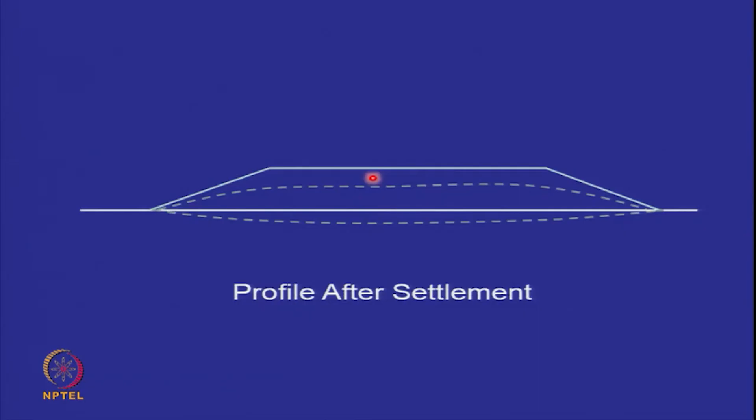So what kind of observations are there in literature on settlements with time? If you plot settlement as a percentage of waste thickness with log time, all the data falls between two boundaries. Firstly, the spread of the boundaries is very large, and secondly, it shows that even if you plot it with log time, there seems to be an increase on the log time basis as you go further ahead in time.

So typically a waste may undergo 1 to 3% settlement within 1 day of its placement, 2 to 10% settlement within 100 days, 3 to 15% settlement say within 2.5 years, and up to 30% settlement over 25 years or more. And the upper limits are all for when the percentage of biodegradables are high.

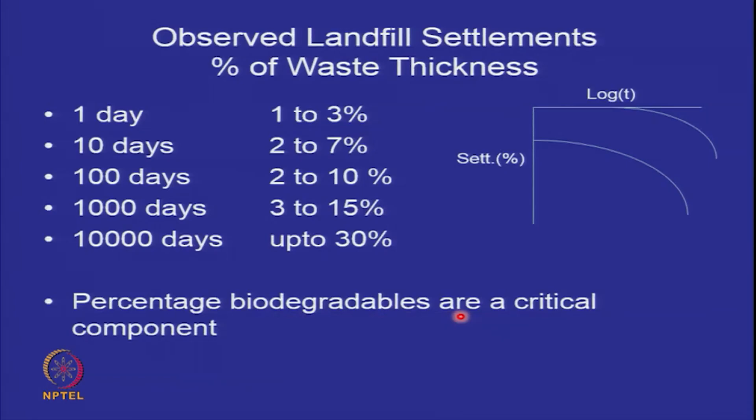What are the mechanisms? We know that we have some mechanical processes, mechanical compression, so densification, grains coming closer together on account of application of overburden stress. But because the grains are not made of silica and they are not rigid, you can have distortion of the grain. The grain itself, suppose to begin with, it is a particle which has a particular diameter. Because of the stress, the diameter may change, its shape may change. It may undergo bending. You may have a linear element which undergoes bending. Many grains may crush. This is even at nominal stresses.

So if there is crushing, that is additional mechanical compression, and of course there may be reorientation. So mechanical compression is not the same as in soils. There are many additional factors. So mechanical compression will be higher. So if you are going to compute the amount of settlement on account of mechanical compression, it will be higher.

Another new component: normally in soils, movement of fine particles does not take place unless you place a fine-grained soil on top of a coarse-grained soil where it can intrude into the void space. However, here, because of the heterogeneity of the mix, your waste may have very large sized particles, as in construction and demolition waste, and you may have fine-grained silt cleaned up from drains. So with time, fine particles tend to move down into the larger void spaces. This is called raveling, and it also adds to settlement.

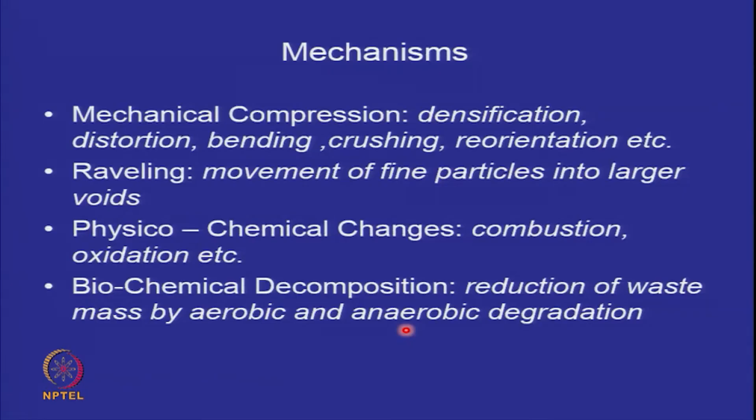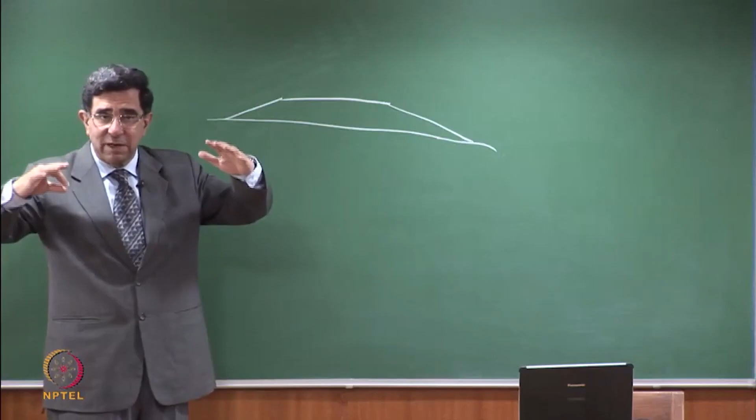Another aspect I want to clarify: if I have a landfill, its settlement will be irregular because of the lateral heterogeneity of the material. If everything was similar, it would settle in a similar manner, and you would have perhaps a settled profile like this.

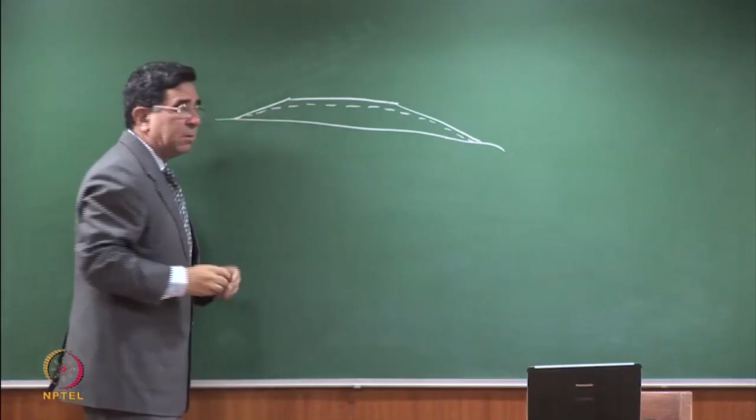But because there is lateral heterogeneity, the waste right below my feet may have one set of properties, and the waste here may have another set of properties. This may have a lot of construction and demolition debris, which is inorganic and won't undergo biodegradation. So the truckloads placed here had a lot of C&D waste, whereas the waste placed here had a lot of food waste. So you have lateral variability.

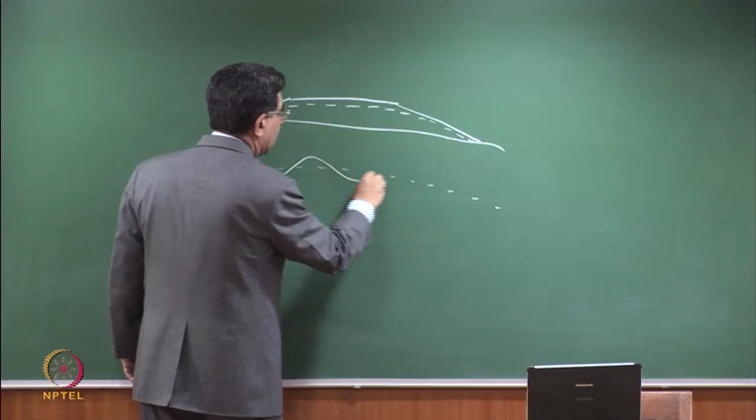That lateral variability means this profile is not like this, but more like that. So we are not trying to estimate this, we are trying to estimate this.

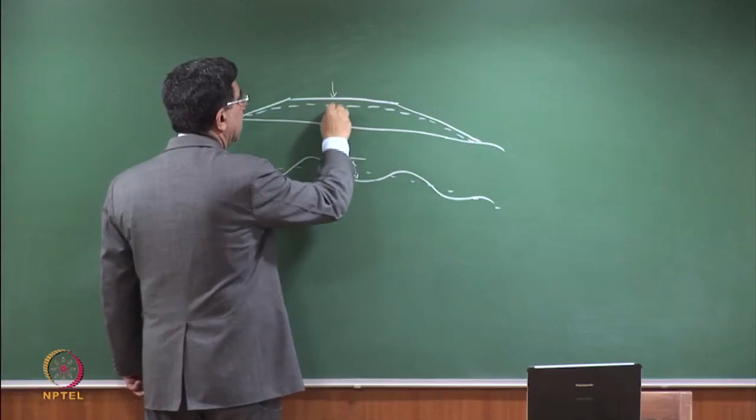Going back to differential settlement versus total settlement in soils: differential settlement occurs between two foundations. They may have equal stresses but still undergo differential settlement because the size of foundations may be different, so the stress area may differ, or there may be lateral variability in the soil. So the only way to tackle differential settlement was to limit total settlement, since if you limit total settlement, you can limit differential settlement.

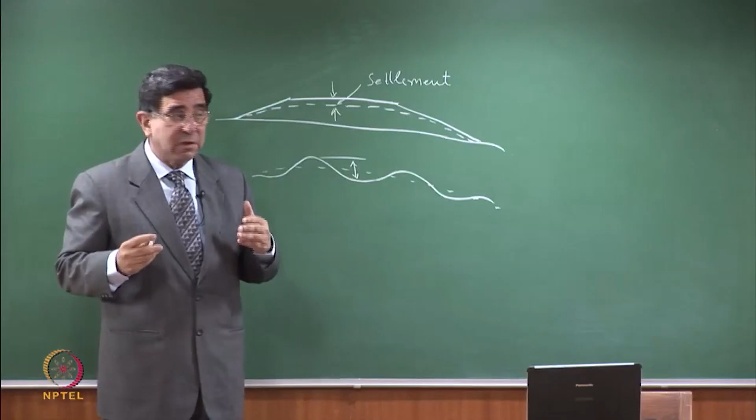In our discussions today we are looking at total settlement which is going to take place. It is possible that in one region settlement may be much lower because of lateral variability, and in another region much higher.

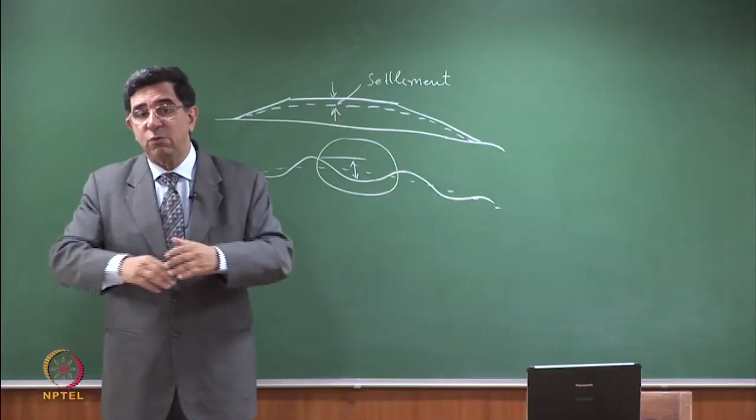This issue of the depression which forms in covers is a totally different issue. There you have to estimate the radius over which the depression will form and the amount by which it will form, which is much different from the total settlement that may occur.

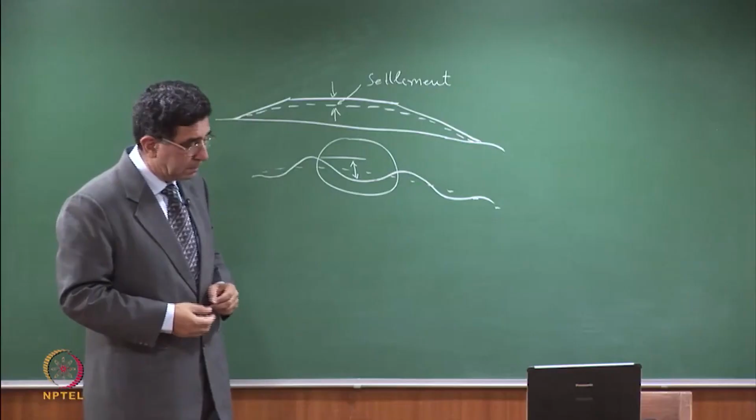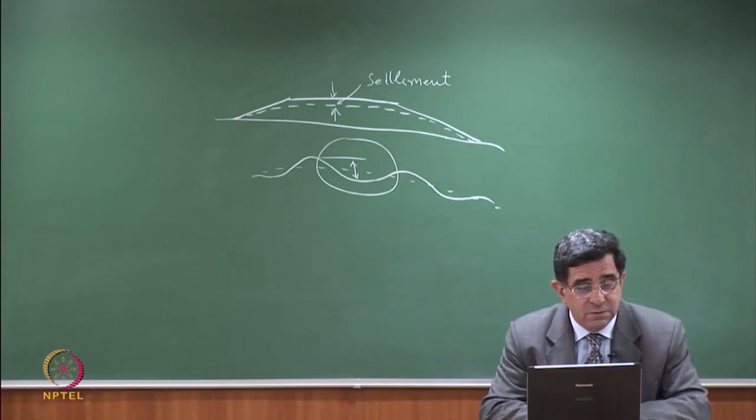So the factors which affect settlement: you'll remember that for amount of settlement we had the effective stress, the initial void ratio, and the ratio of final stress to initial stress. Here additional factors come into play. Yes, there is the initial void ratio E naught, but also how much you compacted your waste. That's a big factor, because if waste was placed loosely at one site, and at another site the same waste was compacted with landfill compactors giving high stresses, it would make a difference.

Also important is the type and amount of daily cover. The rate of biodegradation depends on how much moisture gets into the waste and what oxygen is available. So wherever you put more daily cover, you are slowing down the processes of degradation, which reduces the rate of settlement. Height indicates the amount of overburden stress coming onto the waste.

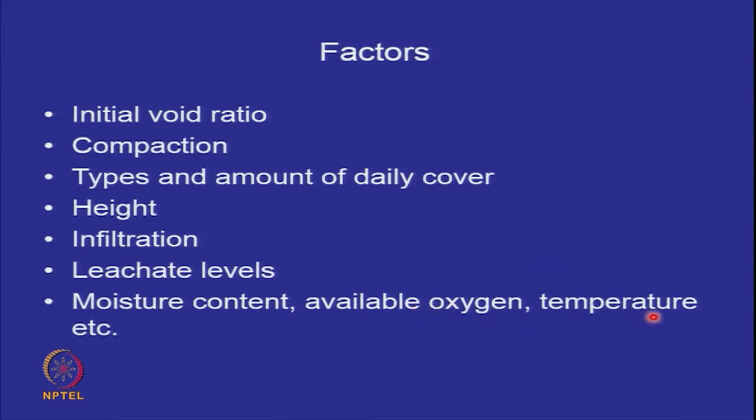Infiltration governs the rate of biodegradation, how much water is infiltrating into the landfill. Leachate levels matter too, how much of the waste is saturated because of accumulation of leachate at the bottom. Moisture content, available oxygen, temperature, etc. There are a large number of factors affecting the rate of settlement in a landfill.

If you look at post-construction settlement rate, this is something observed to be maximum. You finish a landfill, you have settlement gauges on the surface, and you keep monitoring at what rate they are going down. So there is a lot of data on the rate at which landfills settle, and they use the concept of median fill age. What is median fill age?

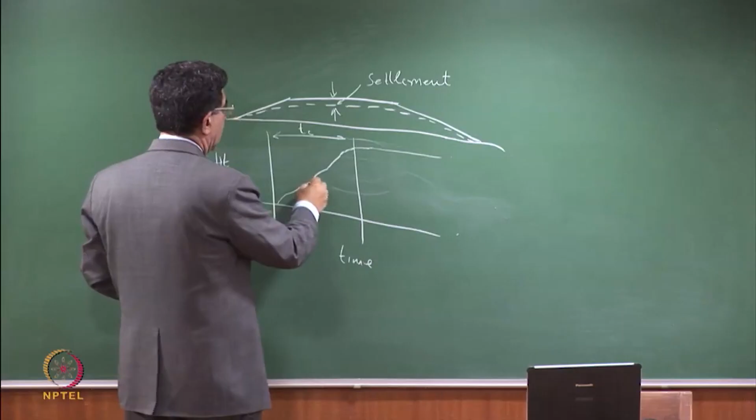If the landfill height increased like this, this was the construction period, and then no further construction. Then this is TC, time for construction. If at any point of time you want to find the settlement, you take the reference point as 0.5 TC.

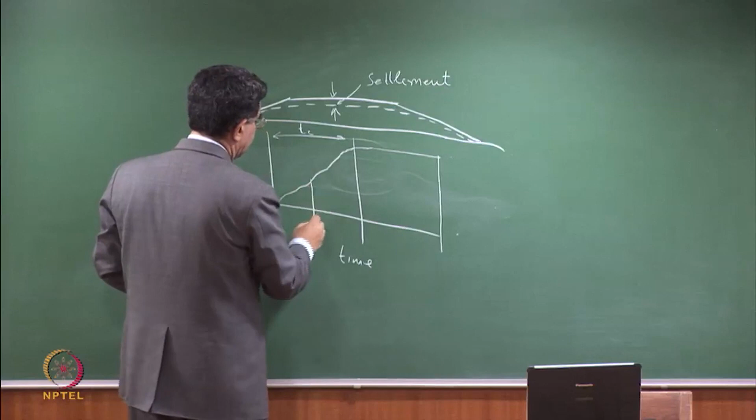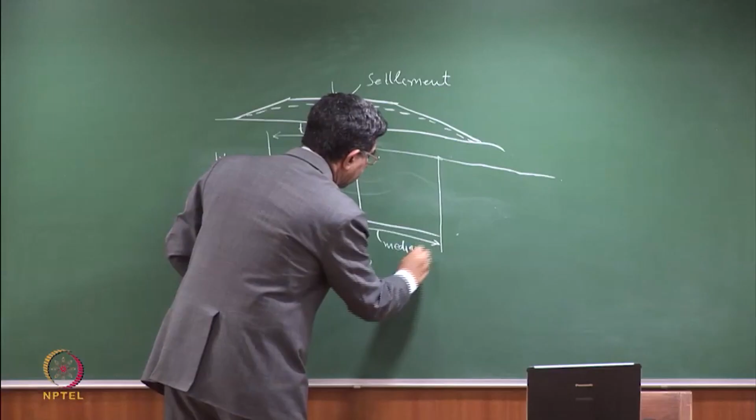With time, this height is going to go down because the landfill is settling. There is data on this, which is what is called the median fill age, from 0.5 TC to any time t for which you want to understand the rate of landfill settlement.

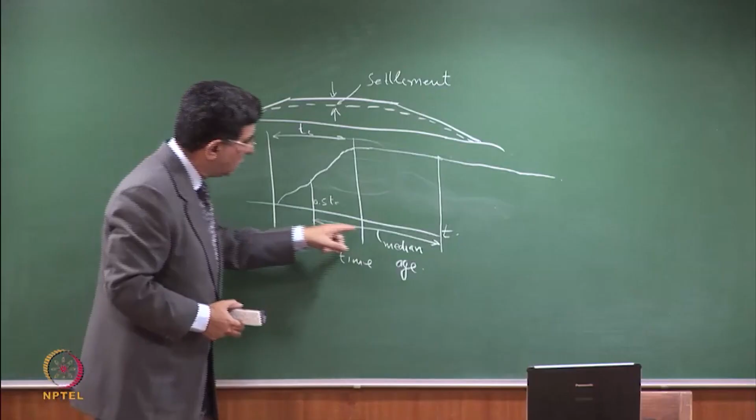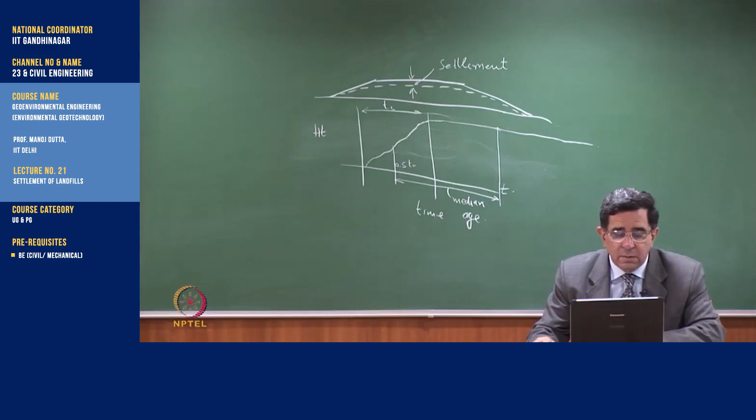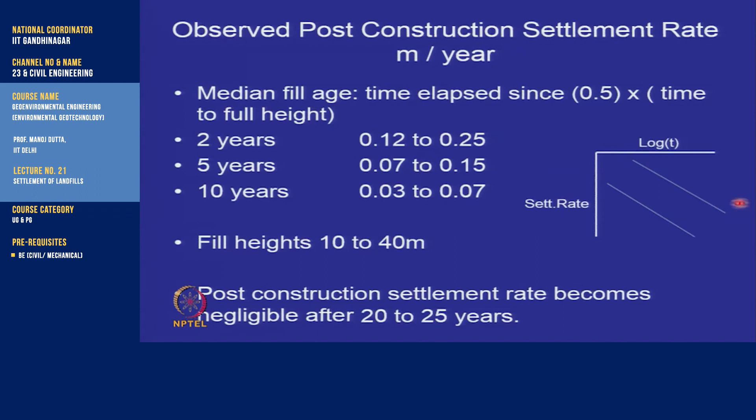So this time, if you look at it, if it is 2 years, then the rate of settlement of landfill per year is reported to be between 0.12 and 0.25. And you can see it's decreasing, the rate at which it is settling. If it is 5 years, it is 0.07 to 0.15 meters per year. And if it is 10 years, it reduces to 0.03 to 0.07 meters per year.

This data has all been observed, and it is for landfill heights of 10 to 40 meters. It seems to suggest, as you can see, the rate of settlement is going down, and the post-construction settlement rate becomes negligible from 20 to 25 years.

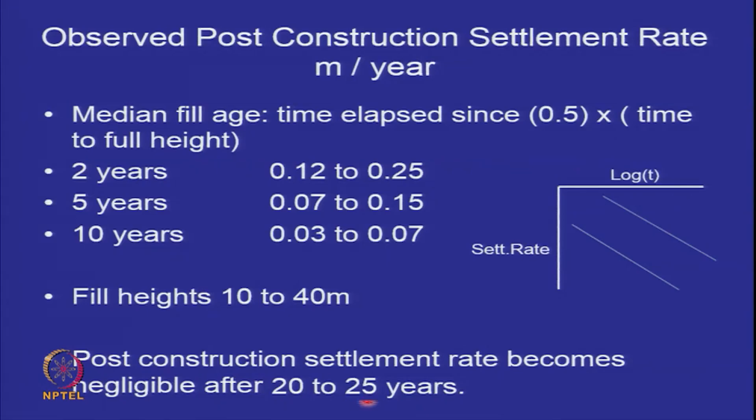Let's look at how we now estimate the settlement which will occur in a landfill, going back to our soil mechanics principles. The total settlement is equal to the sum of immediate settlement, consolidation settlement, and secondary or creep settlement. Is it possible to distinguish between immediate and consolidation settlement in soils?

Do you remember the square root of time method? You plot how the thickness of a sample changes, and the immediate settlement will occur right in the beginning, and then you'll have a consolidation settlement which is time dependent. This is possible in clays. Is it possible in sands?

Immediate settlement and consolidation settlement become lumped together in sands. Why? Because sands are free draining and water comes out instantaneously. So immediate settlement and consolidation settlement happen together.

Similarly, immediate settlement and consolidation settlement in waste also overlap each other, unlike fine-grained soils. So they are lumped together as primary settlement. Secondary compression in waste includes the effect of decomposition and degradation, unlike in organic and peaty soils, where this may not necessarily be the predominant component. It will be there, but it may not be predominant. So the total settlement in waste is computed as primary settlement plus long-term secondary settlement.

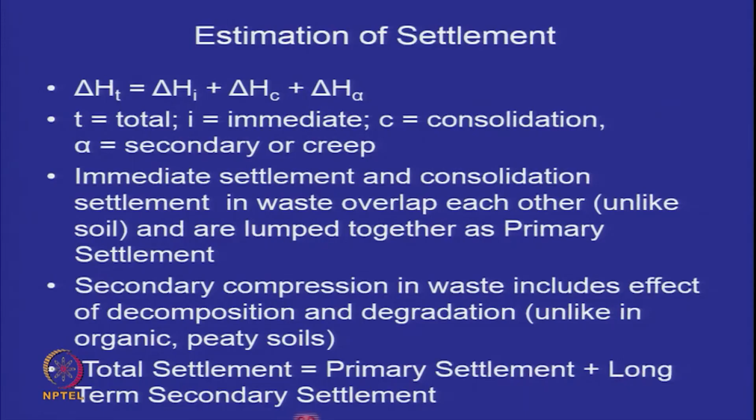Long-term secondary settlement is primarily on account of decomposition and degradation. So if we go back to the formulae we are aware of, primary settlement equals Cc times H naught, divided by 1 plus E naught, times log of sigma i over sigma naught, where sigma i is the stress at the ith height. In our parlance, this should be sigma dash and sigma dash, the effective normal stress.

In waste parlance, normally there is no water table. When are you going to use effective stresses? When there is going to be a water table. There may be a leachate head at the bottom, 1 meter or 2 meters, but mostly on all above-ground mounds, or even below-ground mounds where the water table is below, the leachate tends to flow out. So here the formula which is used very often is to just use the total stresses.

The other important thing is that, having worked with Cc in soils, first attempt was made to compute using this formula. But then as a computational device, it was found that Cc over 1 plus E naught, if it is reflected as a parameter Cc dash, that was much more easy to handle and established than Cc over 1 plus E naught.

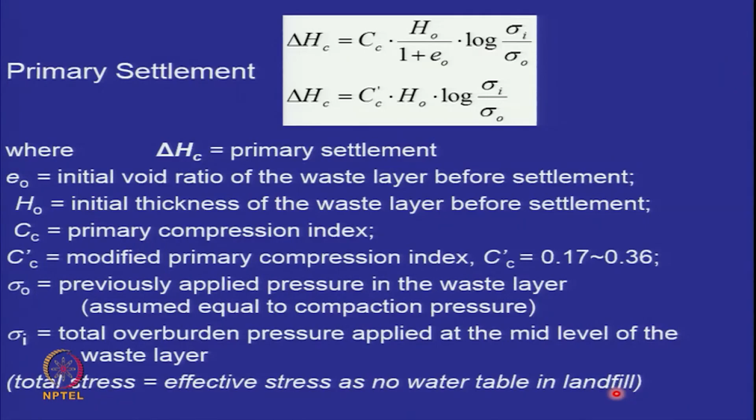If I look at secondary settlement or the long term creep settlement, the formula, if you will recall, changes to this, whereas where C alpha is the secondary compression index, and now it becomes a function of T2 by T1, where T1 is the starting time and T2 is the ending time that we are targeting.

Again in this, the approach which is used for municipal solid waste is to substitute C alpha over 1 plus E naught by C dash alpha. So instead of using the secondary compression index, you use a modified secondary compression index, and here also you will see that it varies about threefold, 0.03 to 0.1. So we can use these formulae to estimate the primary settlement and the secondary settlement.

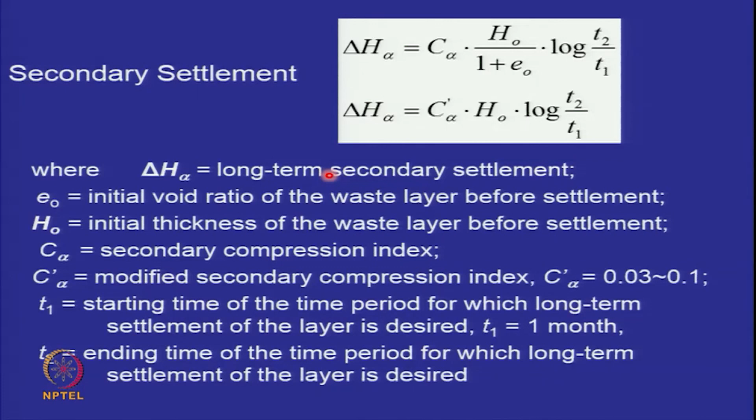So what are these modified indices? The modified indices are that Cc dash is equal to Cc over 1 plus E naught, and Cc dash is obtained from the plot of delta H by H. So for landfills, you know the delta H by H, and you can plot versus the log normal stress, and you get a straight line relationship, and therefore you get a value of Cc dash.

If you try and determine Cc, you can also determine Cc, but typically Cc varies from 0.25 to 6. For E naught of the waste, from 2 to 15. Please first remember, what was our E naught in soils? What kind of E naught are we typically dealing with in soils? 0.5, 0.6, 0.8. 1 is rare, very soft and flocculated clay, it may give you more than 1. But basically our void ratios which we have been dealing with have been less than 1.

In this material, which has such large heterogeneity and such large void spaces, your E naught can be very high. So using these two parameters in the formula requires you to have a very accurate estimate, and doing a consolidation test on waste is cumbersome because you require very large oedometers or very large consolidation cells.

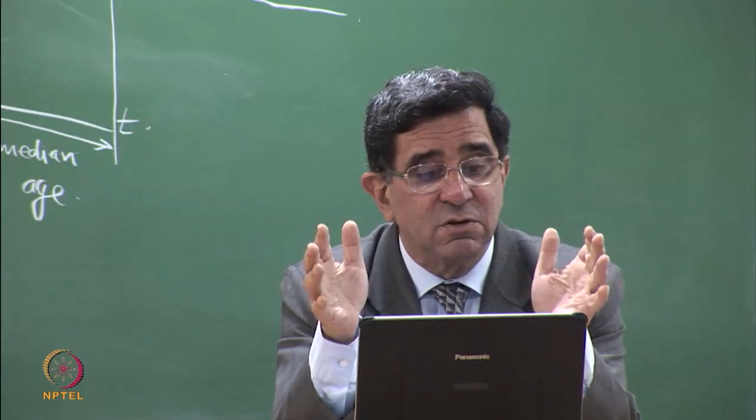Instead, if you take the data which is available in literature and you look at this data, you plot delta H by H versus log sigma dash n, where the time factor has not become very significant yet, then you will get your Cc varies, Cc dash varies from 0.17 to 0.36.

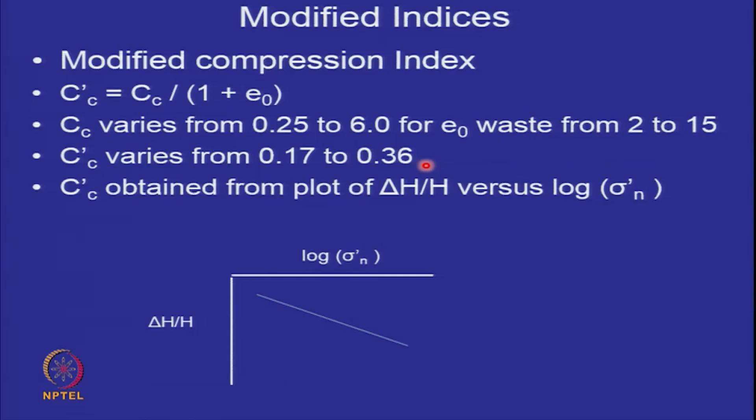The other modified index is C alpha dash. Here also, if you plot delta H by H as a function of log time, then you normally get a straight line relationship, and in such cases C alpha dash varies from 0.03 to 0.10.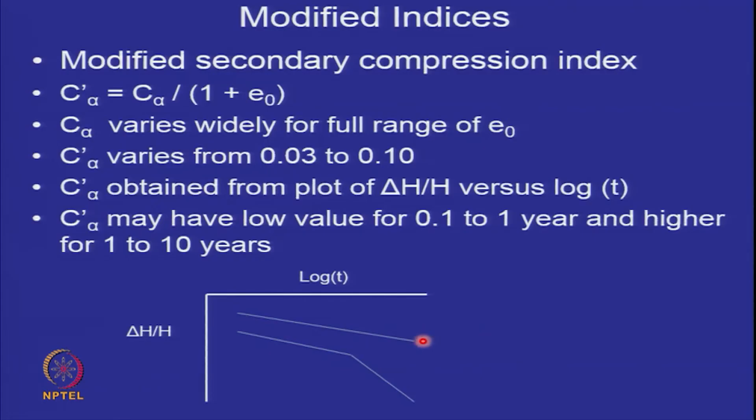Some other empirical correlations have also been suggested, and these have been used, but there the settlement is directly correlated with time for a particular landfill. What they do is use observations of settlement with time available from previous years, and try to predict what it will lead to. So you kind of do a regression analysis.

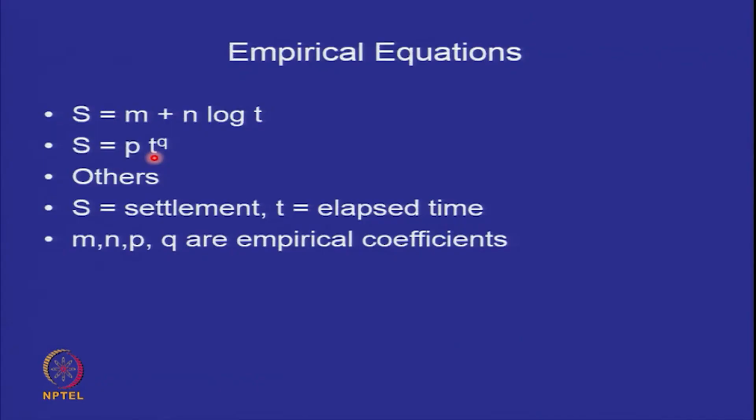So there are some equations like S equals m plus n log t, or S equals p t to the power of q, where m, n, p and q are empirical coefficients. But all we are doing is relating S to t through either a log relationship or a power law. Such laws are useful for specific landfills. You can't pick up this power law of a landfill in the US and apply it to a landfill in India, because that is not going to work.

So I think the best way to demonstrate what we are talking about and how to use these formulae is through an example. I hope you have your calculators here, because I'm going to request you to do some calculations.

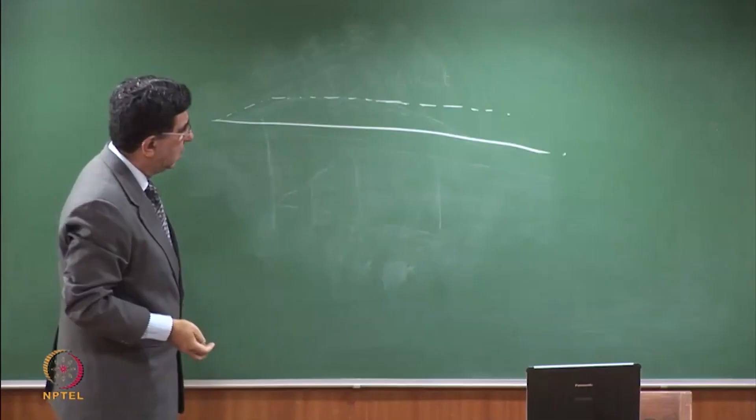So this is an example of a landfill which is operated in phases, and in this example, the landfill goes up to the top in 6 months. We talked about operating a landfill in 1-year phases and closing it. Doing a landfill in 2 years is not okay, because you have not covered it when the monsoons came. Doing a landfill in 6 months is okay, because you can cover it every 6 months, and therefore you can be better prepared.

So what they are doing is, let us look at this problem. The landfill is going up to its final height, 1, 2, 3, 4, 5, 6. In 6 months, it goes up from the ground level to the top, and then the next phase starts. How much the landfill rises in each month does not depend on our design, but depends on how much waste is coming in each month. So sometimes the waste is more, sometimes less — I don't know whether there are festivals or other reasons for it.

So at this particular landfill, we have been told that it is operated in 6-month phases, and the waste coming in is of different thicknesses. What are we trying to estimate here? We would like to know that as I went from the first to the end of the 5th month, then I have to place my final layer — do I have additional space or not? If the first 5 layers have settled, then I will get additional space to put more waste than I thought I could place at that time. So that is the exercise we are going to perform: how much settlement occurs in 6 months, so that in the 6th month I can put more waste.

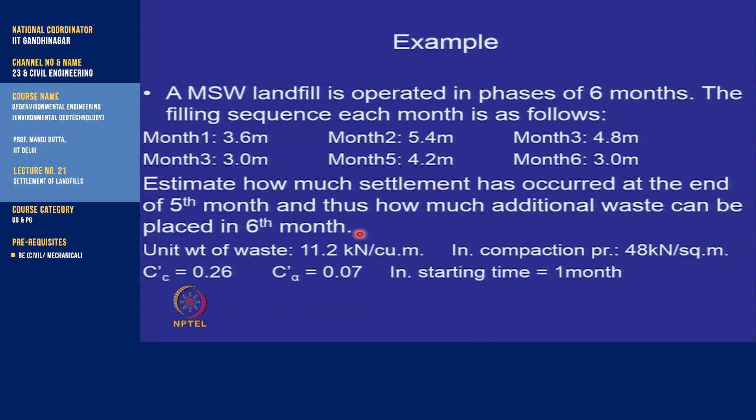I wanted to remember this, that we have said we can get 15 to 25% settlement, we can get up to 30% settlement. So it's always very nice to think that maybe I can use this entire space.

But on the other hand, we are putting our final cover before the next phase starts. Why? Because we want to keep the leachate generation to a minimum. So all additional space that we can utilize is the one which gets generated in 1 year, because after that you have to cover it. Once you have covered it, you're not going to open up a cover after 5-10 years and then replace the cover on top of it. So most of the space becomes available towards the end of the phase.

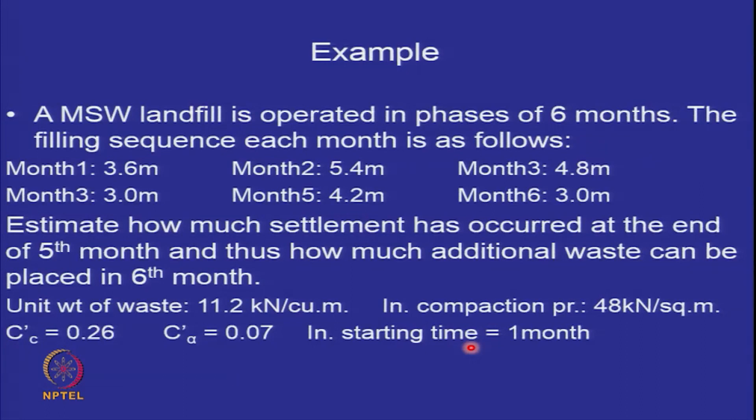So here you are given the unit weight. The initial compaction pressure was 48 kilonewtons per square meter. Cc dash has been given as 0.26 and C alpha dash has been given as 0.07, and the initial starting time that you take is 1 month. What is T final over T initial? T initial always please take as 1 month. So let's see what we can get from this example.

What kind of estimate would you think? Let me ask you 2 quick questions. In 1 year, what kind of settlement would take place? 2%, 5%? Well, we said the maximum is 15 to 30%. So obviously we are just talking of 1 year there; we are talking of 25 years there. So we think it may not be very significant.

Also the next question is, in 1 year which is more? Is the mechanical compression more, or is the secondary time dependent compression more? Let's see what emerges from this example.

So this is what we are saying. We are just going to treat it as layers being placed one on top of the other, and we are just going to look at the settlement of these large horizontal layers placed one on top of each other, each of variable thickness. So here is the way you should go about it. You have each layer, and do all work at the center of each layer.

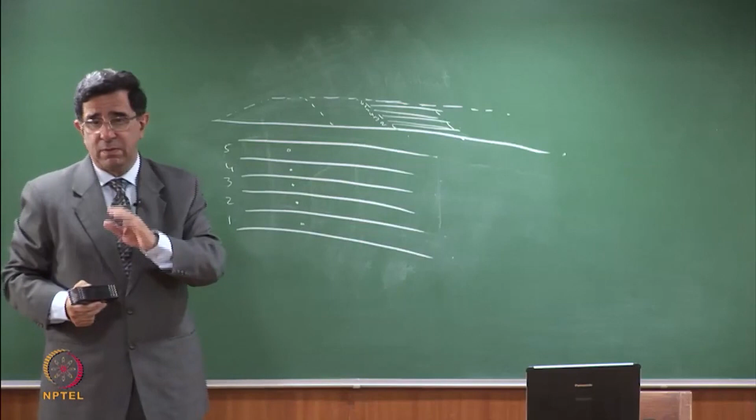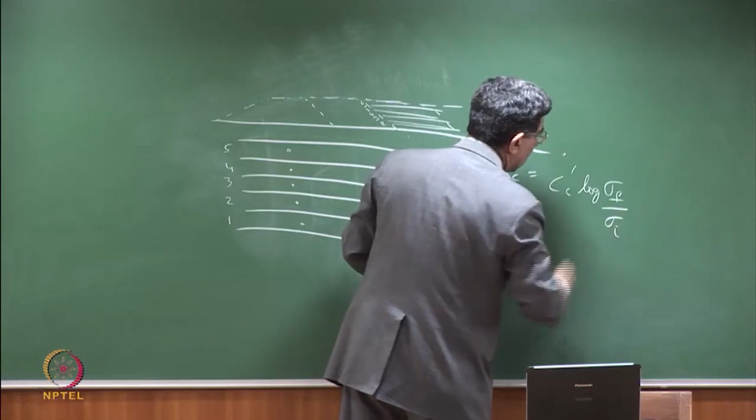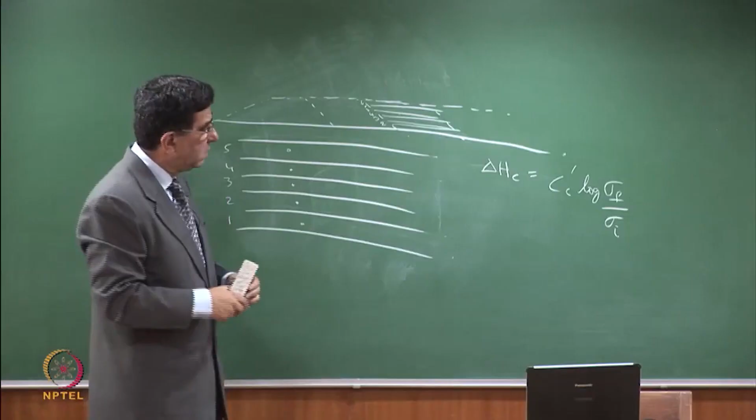And here we are only talking till the end of the 5th month. So let's first compute what is the total delta HC. These layers have different thicknesses, so for each you can find out the height of the soil above it and the stress above it. And what is given to you is sigma I is equal to...

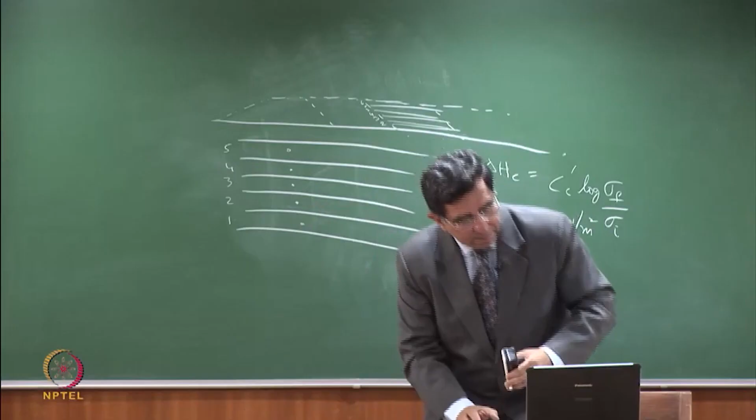So I want to know what is the delta H for this first layer at the end of 5 months, that's what I want to know. And I want to know what is delta H for the second layer at the end of 5 months. So tell me, what will be the height of the waste for the first layer at the middle?

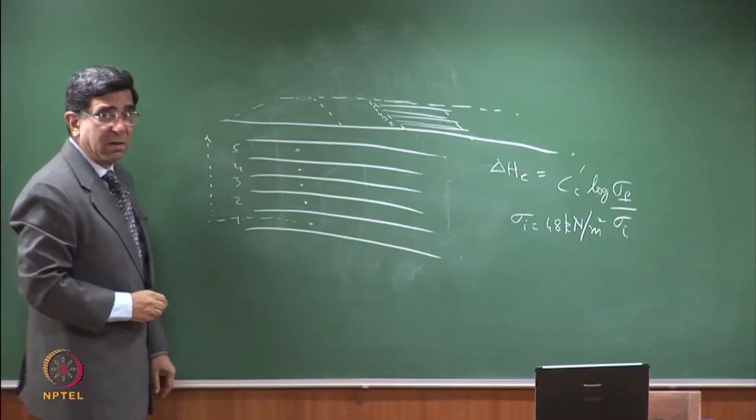No, see, this is layer 1, and this is building up with time. So you have to take the middle of this layer. This layer is 3.6, so this is 1.8. Then 5.4, 4.8, 3.0, 4.2. So the height above this will tell me how much this will squeeze in 5 months on account of the change in the stress which is acting on top.

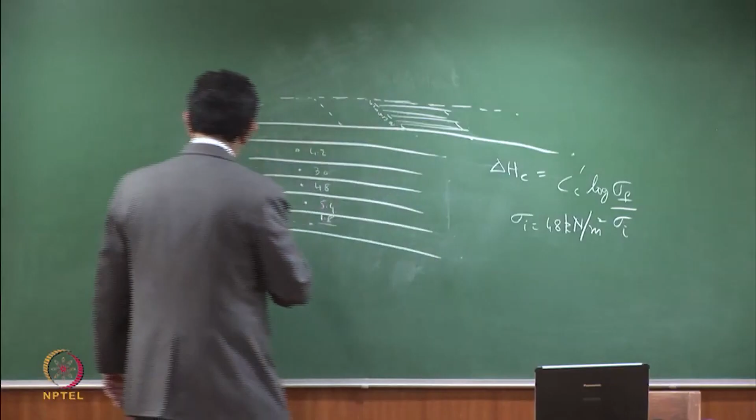So what is this? 19.2. So the second column shows 19.2, and you have 11.2 as your unit weight. So you know the stress, you know the initial stress. Can you give me delta HC? So in fact, it will work out that if this is 19.2, so sigma final or sigma at the top...

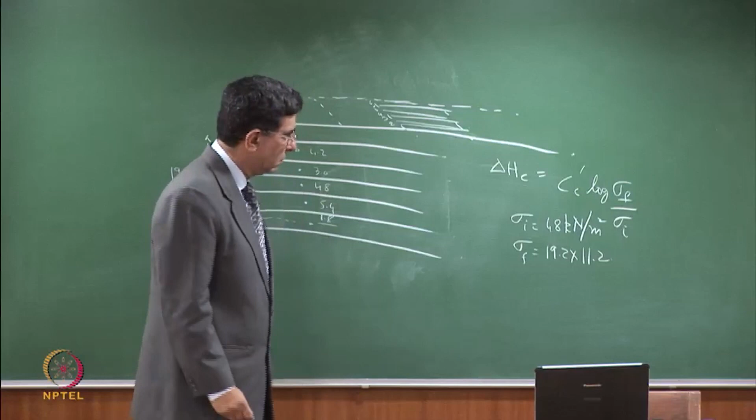So anybody has delta HC for the first layer?

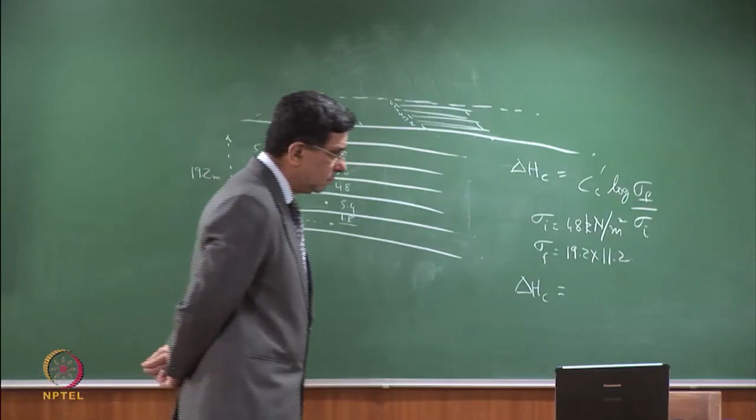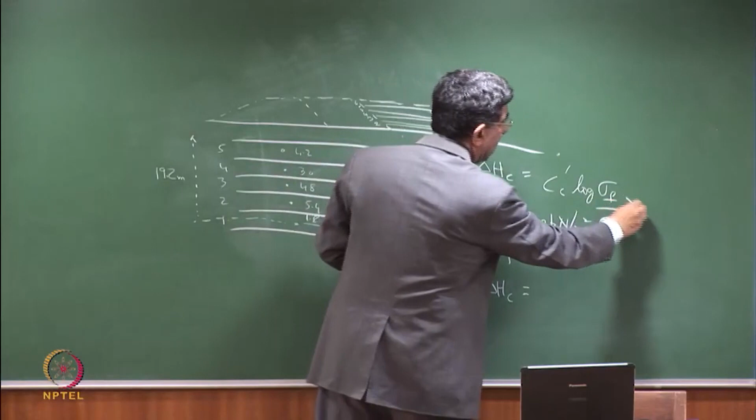You want to know what is the CC value? CC dash is 0.26. Have I put the formula in error? This has to be multiplied by the... so you should tell me that this has been missed.

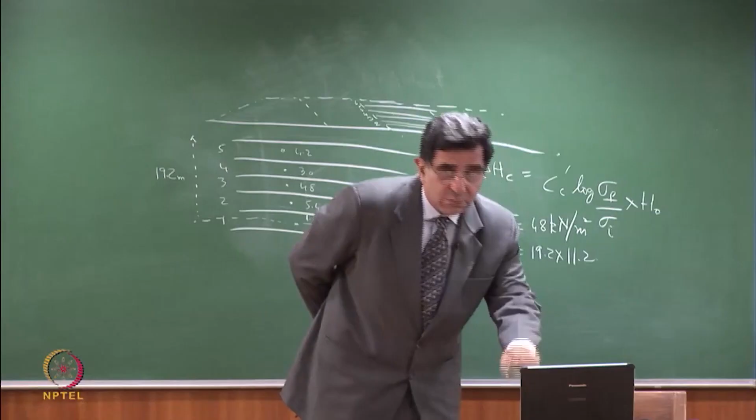Let's look at the next computation. This is the primary mechanical settlement.

Now I want to know the settlement on account of biodegradation and decomposition. This time I am interested in the time that has elapsed between when the waste was placed and when we are computing the settlement at the top. So how much time would have elapsed for the first layer when the fifth layer is completed? At the center, 4.5.

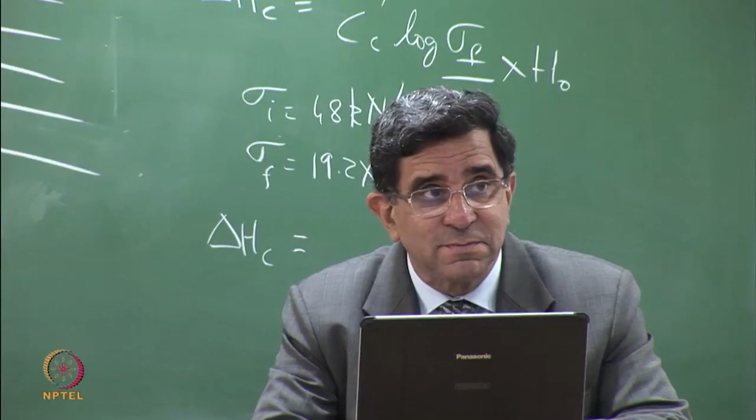So if you were to do this, you will get delta H alpha as 0.17 meter. Please confirm this for me.

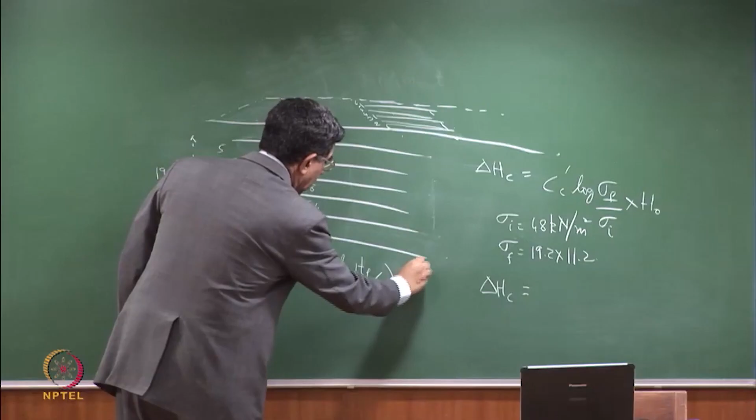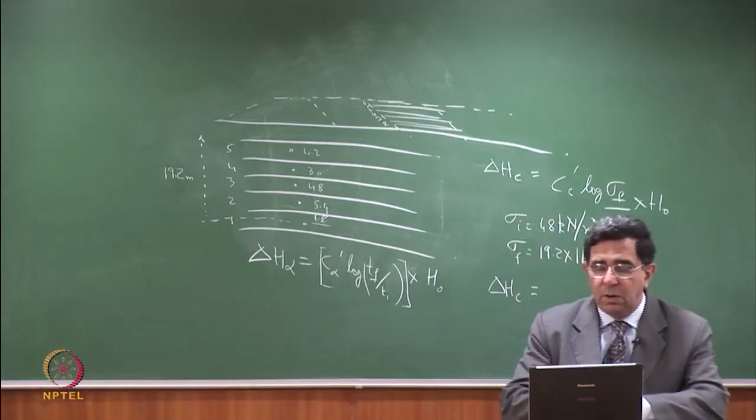So if I complete all the computations, this is what I'll get. You can note down that higher layers have had less time, the lowermost layer has had the maximum time, and these are the values.

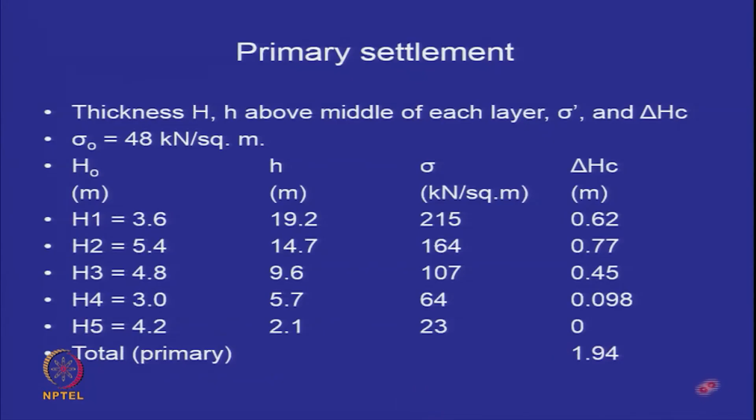And the total secondary settlement is 0.59 meters. And if I go back, the total primary is 1.9. The important thing to see is what happens after 21 meters of waste has been placed, the 3 meters has still not been placed.

We are getting an additional 2.53 meters of space to place waste within a period of 6 months. Well, that's substantive, especially if you have a lot of biodegradable material in it. So we don't estimate this in the beginning, but we can estimate it now as to how much additional waste can you put at the end.

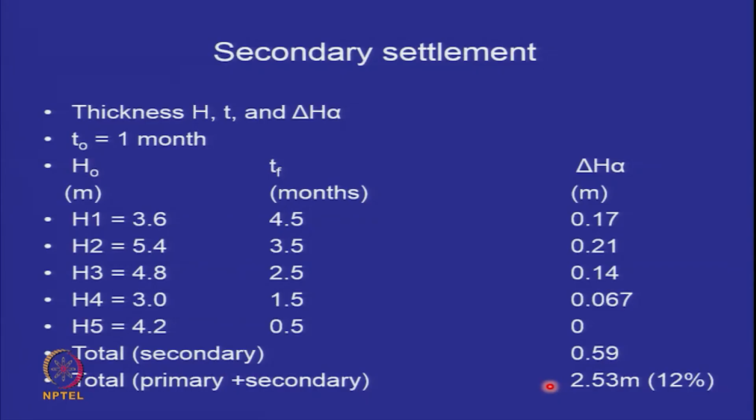And in this case, which was more, the mechanical compression or the degradation? Mechanical was 1.94 and the degradation was 0.59. So time has only passed 6 months, 5 months. So obviously this has not taken over.

But as more and more time passes, what will happen to the primary settlement? Now after this the next phase will start. So what will happen to the primary mechanical settlement as we build the other phases? 1.94, will it change? No, sigma will not change. Other than the 6th layer coming on, sigma will not change. So the primary mechanical settlement has happened and it will not now increase with time.

Only the secondary settlement will keep on increasing with time. At some point of time, the secondary settlement will overtake the primary settlement.

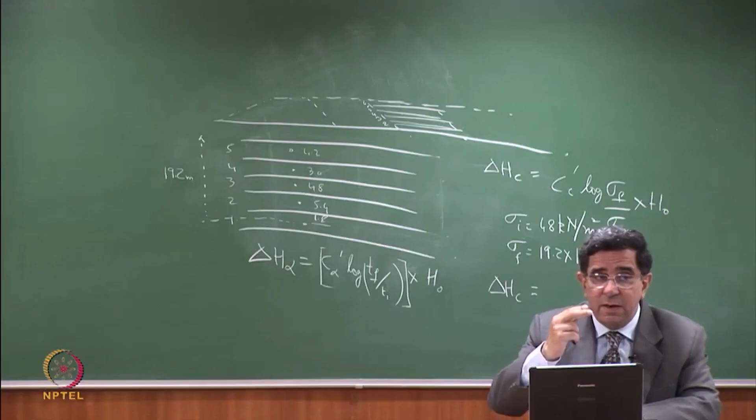So even primary mechanical settlement is very large in waste. And how much time does it take for the primary settlement to occur? The secondary settlement we are estimating over 5 months. Primary settlement occurs in how much time? How much time does the primary settlement, the mechanical settlement, occur?

Suppose I had given you this problem in soil mechanics, how would you have found time for settlement? One is amount of settlement, the second is time for settlement. To find out time for settlement, how would we have gone about it? We would need CV, coefficient of consolidation, and on the basis of coefficient of consolidation we would find T90 and we would say that 90% of the settlement will take this much time.

Here we are not talking of CV. Why? Because it is a free draining material. In free draining material, time for 90% settlement is how much? Instantaneous. So please understand, waste is not being treated like clay or silty clay or clayey silt where it takes time for pore water pressure to dissipate or water to come out, but it is being treated as behaving like a free draining material.

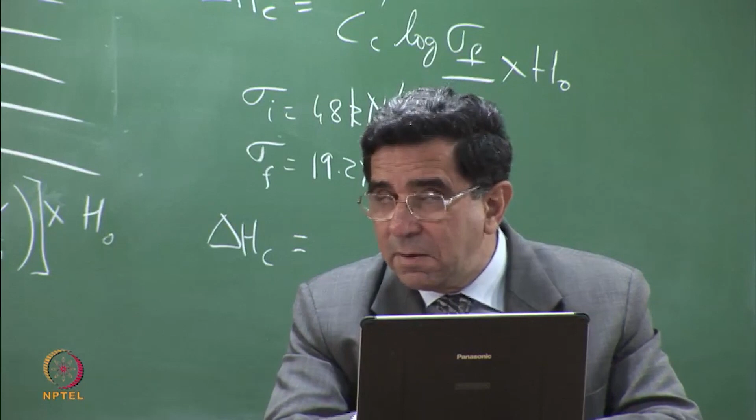Let me take a quick analogy. As I said, this waste is not necessarily saturated because there is no water table. If I have unsaturated clay, which is the predominant settlement? Yeah, so again the primary settlement is not on account of time dependent consolidation, but on account of immediate compression of the air void.

So immediate compression plus the compression of the air plus the reorientation immediate gives you the settlement. So please note that waste is not being treated similar to fine grained soil, but like a coarse grained soil or a soil with a lot of air voids in it. And so all the primary settlement occurs instantaneously. With time, it is not going to increase. It will only increase if the vertical stress increases over a period of time.

So observations: in a few months, more than 10% settlement in terms of waste thickness has occurred. This is substantial. Primary settlement here is more than the secondary settlement.

However, this could have reversed if the value of Cc dash was lower and the value of C alpha dash was higher. So if you had very high biodegradables, you would have had a much higher C alpha dash. So this could have reversed. As time increases, secondary settlement will increase, primary settlement will not change.

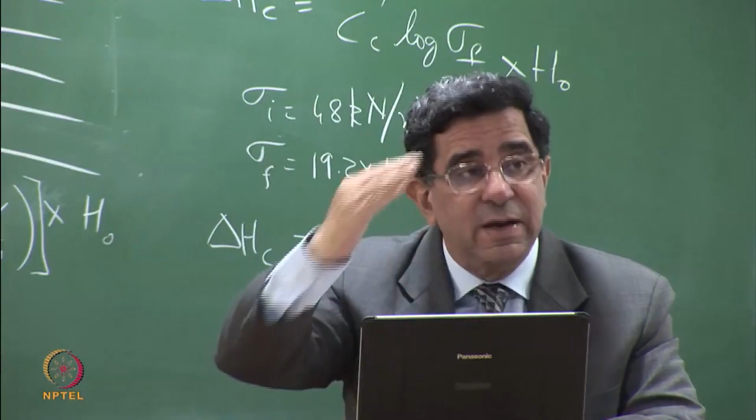So the settlement that occurs from point 1 year to 1 year will next occur in how much time? Suppose x centimeters occur from point 1 year to 1 year, then when will the next x occur? From 1 to 10. So do not think that with time this settlement is going to go up linearly; it goes up only in log time.

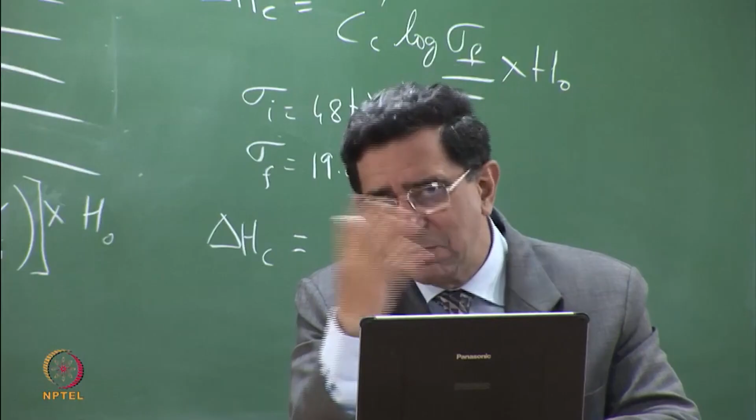So 10% has occurred now, and the next log time will make it go up to the next level. As time increases, secondary settlement will increase, but not linearly with time, it will increase linearly with log time. So all the observations are for 0.1 year, 1 year, and 10 years. If you look at most landfills, most of your observations are at those cycle times.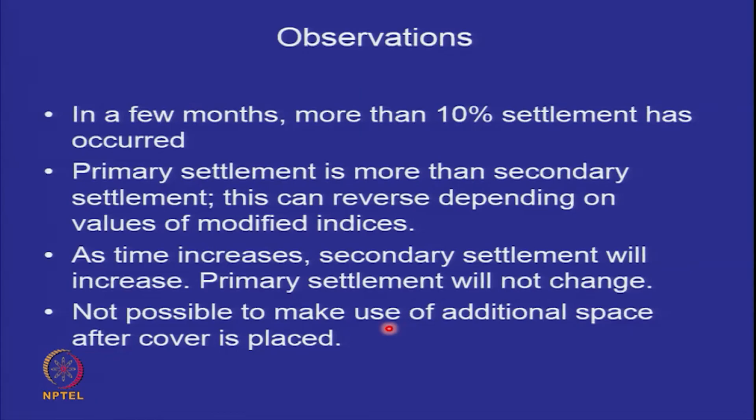Primary settlement will not change, and it is not possible to make use of additional space after the cover has been placed. So what we have introduced you to today are 2 new concepts. One is that waste can be treated similar to soils.

However, the concept of Cc and C alpha is not so useful because the void ratio is a big issue. The concept of Cc dash and C alpha dash has been proven useful because readings of delta H by H versus normal stress, and delta H by H in terms of time, are available. We can do correlations with log time and log sigma, and on that basis we find that Cc dash and C alpha dash are in a narrow range, so we can use these for the purpose of estimating.

Still we cannot estimate the depression. What have we estimated? Total settlement. If we go back to the concept of differential settlement, going back to soil mechanics principles...

If this is total settlement, then we say differential settlement will be a small percentage of the total settlement. Why? Because that is on account of lateral variability, and total settlement is a design parameter derived from all the engineering properties of the ground.

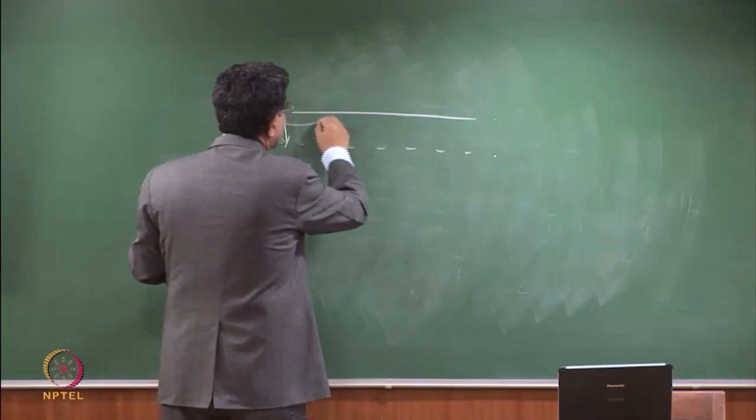So if you have done your settlement analysis properly, and chosen the value of Cc properly, or are using the modulus of elasticity properly, you have the correct value of total settlement. Differential settlement may occur on account of the ground actually moving like this, but differential settlement will always be smaller than the total settlement.

So in foundation design, restrict the total settlement and you will not have differential settlement, and then you will not have cracks, and therefore you will not be bothered. In waste, we have now estimated the total settlement, and this settlement is going to keep changing with time because our decomposition processes are ongoing.

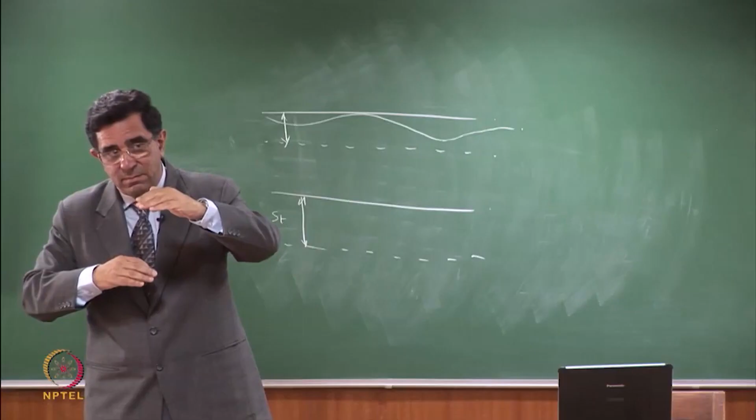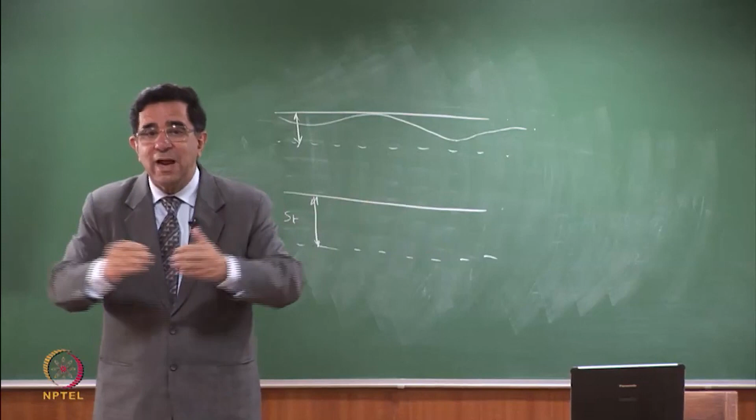When you design the cover for depressions or sudden subsidence, you have to remember that your subsidence will be within this total settlement. However, what is the problem? What is the width of the crater? What is the width of the depression? That is something you are not able to predict, because it will depend on how the lateral variability is.

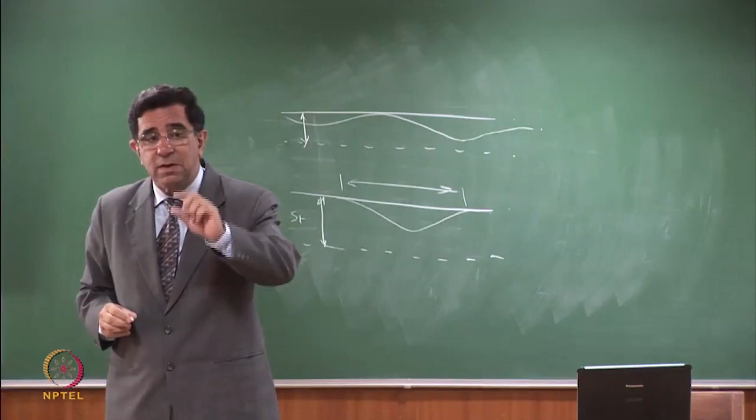So when you do cover designs for the purpose of designing for a depression, you have to identify this. Do not use total settlement for the purpose of cover designs, because the depression will be a small fraction of the total settlement.

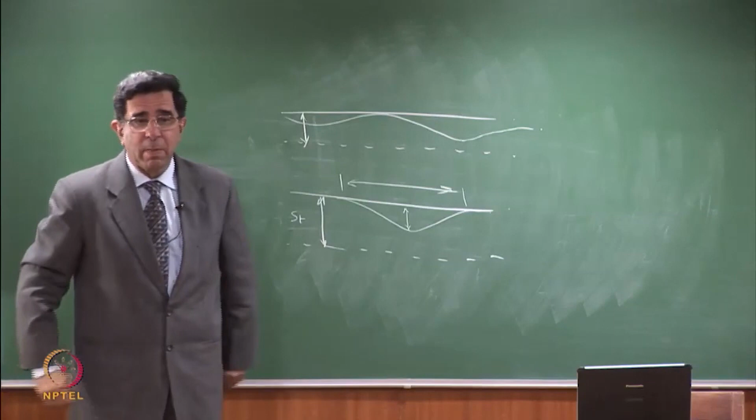But we now have a handle on how to calculate ST and how to see the way it changes with time, and that is something very important. Data is not adequate, data is still being generated, and things are improving with time. Maybe the state of the art will improve over the next 5 to 10 years, but this is what the state of the art is today as far as settlements of landfills are concerned.